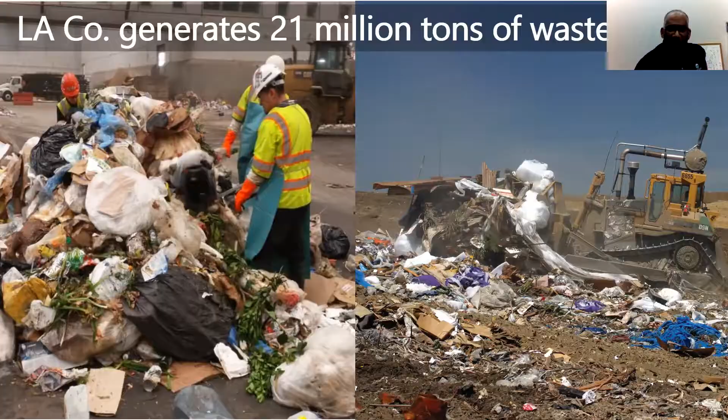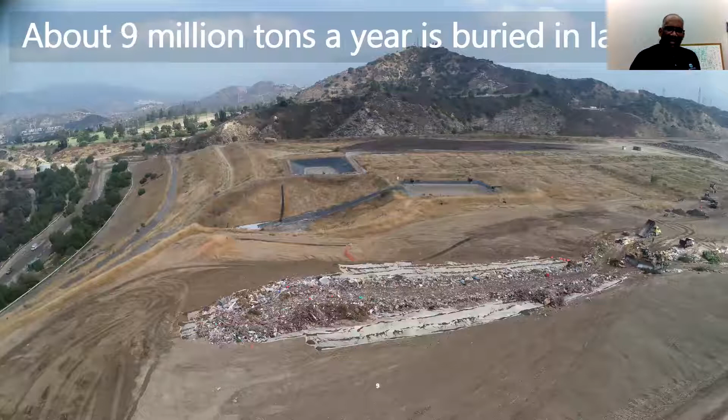So let's back up a little bit. LA County generates 21 million tons of waste per year. As you see here, of that waste, about 9 million tons are buried in landfills in LA County. And this is an aerial shot of one of our landfills, the Scholl Canyon landfill. And of that 9 million tons per year buried in landfill, a third of that landfill waste is organic in nature, food waste, yard waste, and so on.

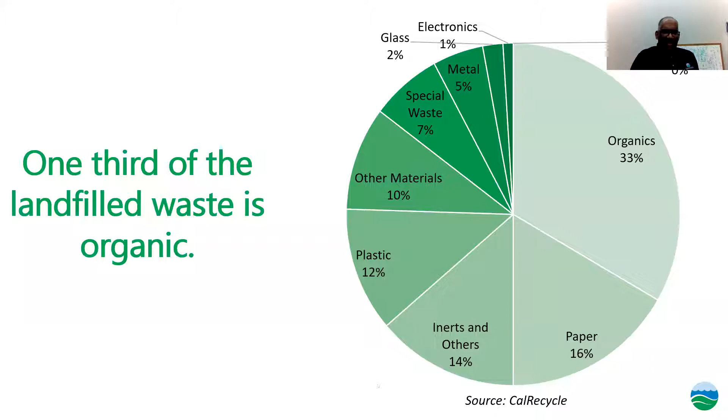And in LA County, a minimum of about 4,000 tons of food waste is thrown out each day. And there's a shot at our Puente Hills material recovery facility of some of this food waste that we take into our facility. And this food waste, if it's disposed in landfill, can release methane into the environment.

And one of the things that people don't realize is that methane is a greenhouse gas. It's 23 times more disruptive than carbon dioxide. And food waste is responsible for at least 6 to 8% of the greenhouse gas in our atmosphere.

So a number of years ago, California, taking the lead in terms of climate change, passed a number of laws. At the core, what these laws are trying to do is divert organics from landfill. There are 2 laws in particular. AB 1826 required mandatory commercial organics recycling. It started with a company that produced 8 cubic yards of waste per week. They ratcheted it down to 4 cubic yards. And recently, they ratcheted it down to 2 cubic yards per week. So there's mandatory organics recycling.

And then SB 1383, which required a 50% reduction in landfill organic waste by 2020, and a 75% reduction in organic waste by 2025. And these are compared to 2014 levels.

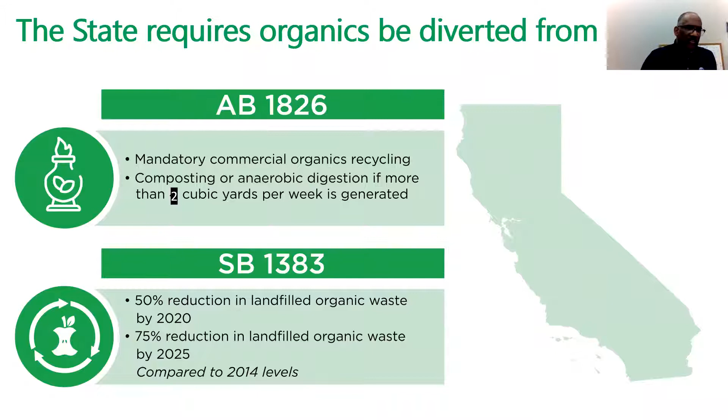No, you're good to go.

Okay, good. All right, so our food waste program can help cities and businesses meet these organic diversion laws. And we're uniquely situated because we have a wastewater side, we have a solid waste side. On the right, you see our largest wastewater treatment plant. This is the Joint Water Pollution Control Plant in Carson. And these circular deals here are anaerobic digestion.

So California law, food waste, if it's not going to landfill, then they want it either composted or anaerobically digested. And we have a lot of them. We have 24 anaerobic digesters. And the beauty of these things, they're sealed. All the gas that's generated in there is captured and cannot go into the atmosphere. So this is our largest treatment plant.

And then on the left-hand side, this is the foundation of our solid waste management facility. This is a shot of our Puente Hills Material Recovery Facility, and it can handle up to 4,400 tons of refuse each day. And so we can gather waste here and recycle it or segregate it or process it and then bring it to our joint plant. So we already have existing infrastructure to do this organics diversion, food waste recycling required by the state.

So let me break down our recycling program. We have 3 major steps. First, we have food waste. Source separated food waste is brought to the Puente Hills MRF and it's processed.

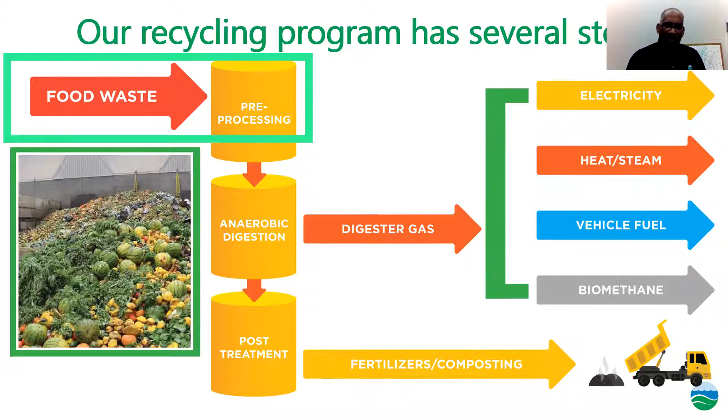And then the last step is the stuff out of the digester, we compost it, we turn it into soil amendment. But let's go through the first step, what happens to source separated food waste. So here you have source separated food waste. It may come from a grocery store or restaurant, a school, any kind of institution. We even have food waste bins at our main office that have source separated food waste. So we collect source separated food waste.

The hauler then brings it to our Puente Hills MRF, Puente Hills Material Recovery Facility. They weigh in here. It's about $70 a ton to bring in source separated food waste. But we also negotiate contracts that could be as much as $10 a ton lower than that. And then you would drive in after you weigh, and this is driving into our Puente Hills Material Recovery Facility.

You can see on the left recyclables that we've pulled out of the waste. This is a fully enclosed building. It was built in 2004. It can fit like 3 jumbo jets in there, and it's basically set up to recycle. If we find a commodity in the waste that has value, we can orient our operation and pull it out. So you can see recycled material being piled up to be sorted and recycled on the left, and on the right is where we take the source separated food waste, and we're going to take a closer look and show how we start processing that.

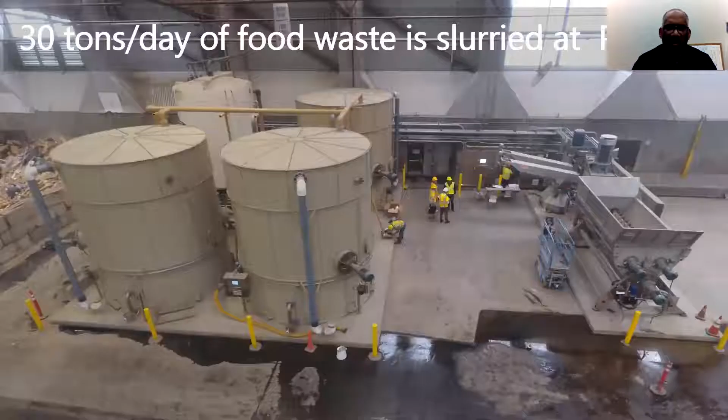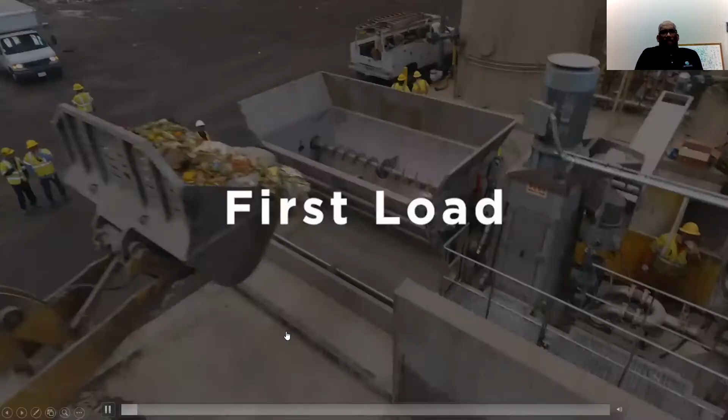So here's a closer look at that shot on the right. At the Puente Hills Material Recovery Facility, right now we're taking about 30 tons of source separated food waste, and it goes into this hopper, and then this hopper feeds into these 2 bioseparators, which are like huge garlic presses that squeeze the food waste through openings. And we'll show you a video of that. And then from there, that food waste is turned into a slurry and we store it in these tanks. So let's take a look at the videotape. So this is video taken the first day we opened this program a couple of years ago.

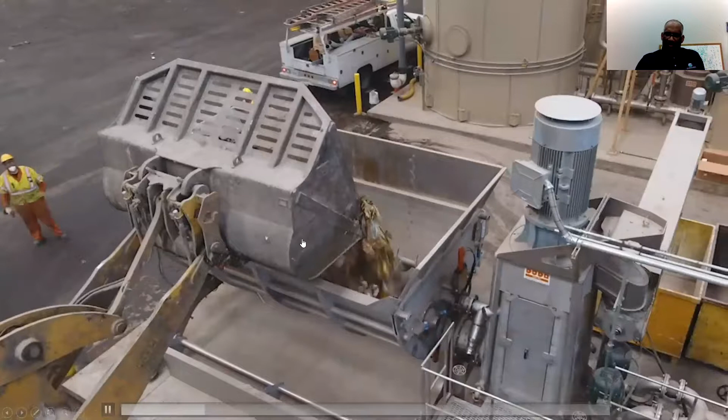This was the inaugural food waste in what we call our Doda system. You see the loader dropping stuff into the hopper, and then the food waste will be pushed into this, called a bioseparator. Let me just pause it here for a second. If you open up the door right here, this is what you would see. It's called a hammer mill, and Will is more of an expert on it.

The hopper feeds the food waste into this chamber that you see here opened up, and you can see these openings. Then these arms press the food waste through these openings. Just think of a garlic press, how you squeeze garlic through the opening. So the food waste is coming through this way, and the plastic and the inert material that we don't want stays inside, the same way you might have the skin of the garlic staying inside the garlic press. Let me continue with this inaugural videotape.

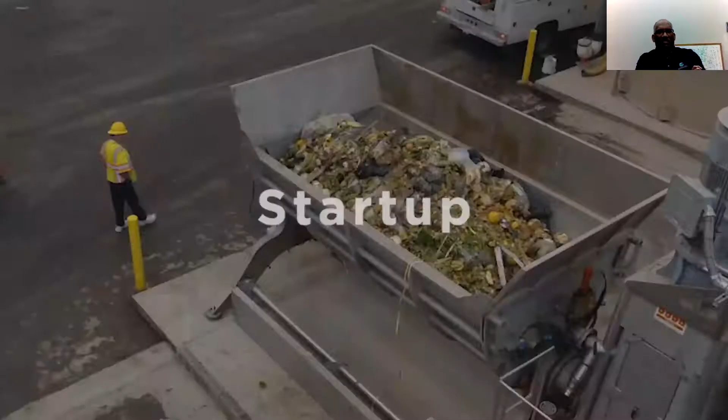Even source separated food waste has a lot of plastic in it. Not as much as regular trash, but much better. So every so often during the day, one of the operators has to clean out the bioseparator. Here's the hopper in motion. You can see the plastic bags, and you can see the plastic coming out of the bioseparator.

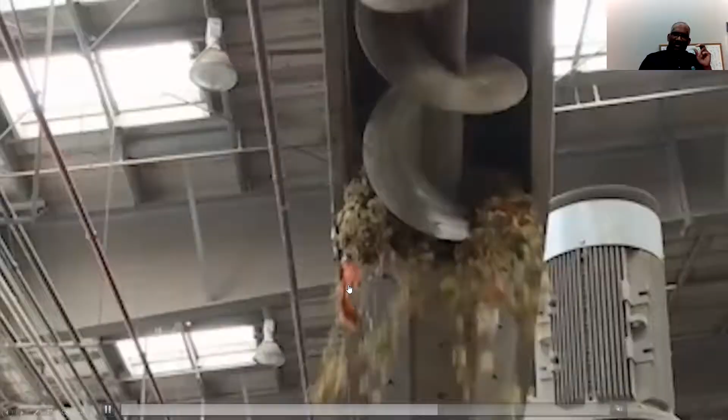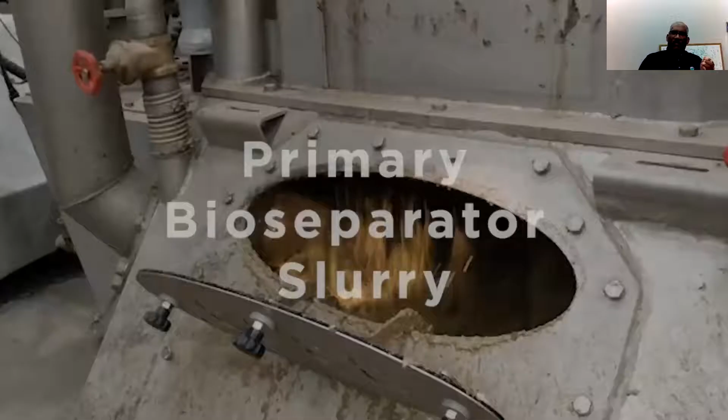There are two sets of bioseparators. The second set has smaller openings, so finer pieces of plastic get rejected, and that's what you see here. All this stuff, the plastics and the inert material, gets landfilled, and then you're left with the good stuff. This is what we want. Here's the food waste that has been slurried, turned into a smoothie type consistency. We mix it with water if we need to, but we need the right consistency.

And then that food waste is, as I said earlier, stored in these containers right here. And then from there,

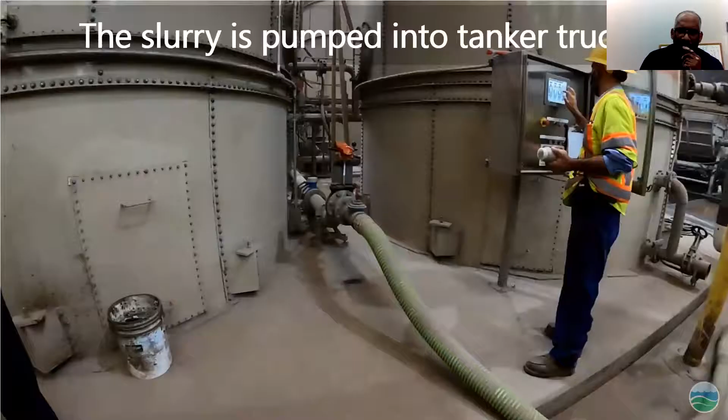Basil, yes, we have a raised hand from Lori. Okay. Hi, Lori. You have a question, Lori? Yes, I do. Okay, thank you so much. I really love the image.

This really works. But does Puente Hills accept only separated organics waste, or do you do any separation? Do you take any commingled waste and separate it, or do you only take separated waste from the cities? Right. And Will, you can chime in too. Will Chen is one of the engineers that helped set this program up. For this food waste program, we're looking for source separated food waste, because cleaning out those bioseparators becomes really time consuming if it's not source separated. We take other kinds of waste that may be commingled and separate them, but in terms of this food waste program, we're looking for source separated food waste.

Yeah, the Doda machine, and good morning, everybody. The machine that we have installed here that you're seeing in front of you was designed really to take source separated, pre-consumer waste. It's primarily coming from restaurants, supermarkets of that nature, where there are larger, let's say, cardboard or large plastic containers or bags that the machine can remove relatively easily.

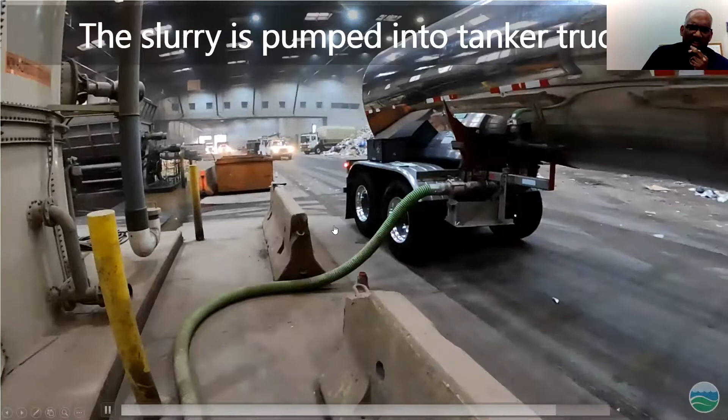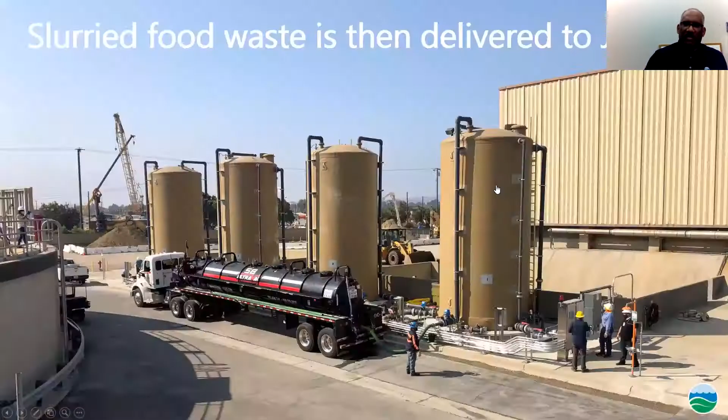All right, so this food waste slurry is then pumped into tanker trucks. And if we went before the pandemic, you would get a tour to see this facility. We drive into this fully enclosed facility, and you can see vehicles coming in. One of the beauties of this facility, it's pretty quick ingress, egress. You don't have to wait in line. But here the tanker truck is loading up the slurry. And then it's taken to our joint water pollution control plant in Carson. And we have 4 receiving stations that were recently built. So they offload the slurry into these tanks.

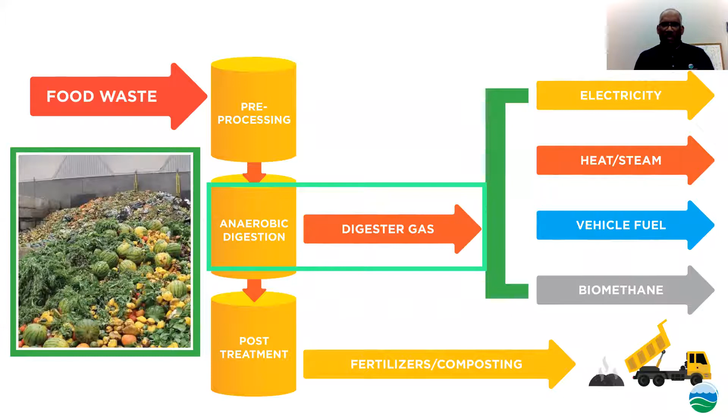And what happens is the slurry is then fed into what we call our anaerobic digester. You see a little bit of one of our 24 there. So this is where the second part of the process occurs. Anaerobic digestion of this food waste generates biogas that we use for energy fuel. So here's an aerial of our anaerobic digesters at our joint water pollution control plant. This facility is right off the 110 freeway at Sepulveda in the city of Carson. It's been there in some capacity since 1928.

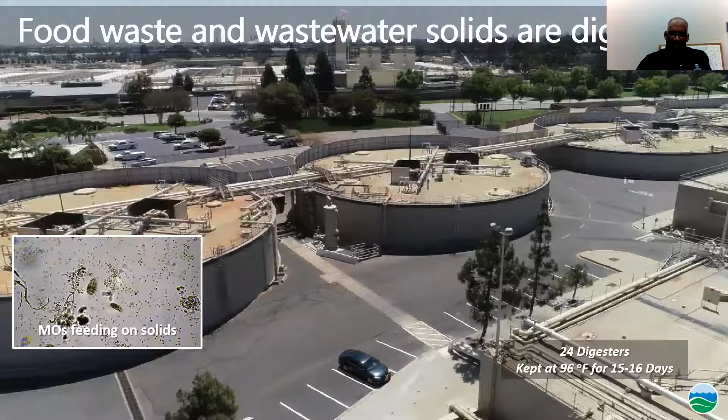And here's the digester. It's an oxygen-free environment. Microorganisms feed on this organic material, and they give off a biogas, which is mainly methane and CO2. About 15, 16 days in there. So here's the top roughly third of this digester. Here's what it looks like inside. These things are huge. Here's a 6-foot board right here. So this thing is about 10 feet above ground, another 30 or 40 feet below ground.

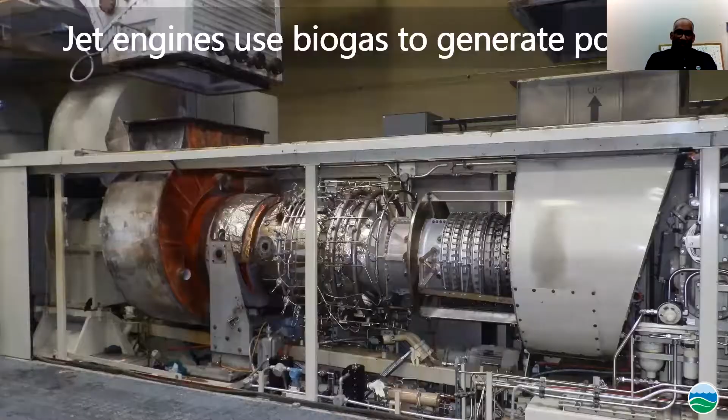And in here, we take the wastewater solids, because at its core, it's still a wastewater treatment plant. So the solids that are removed from wastewater are mixed with the food waste, and it's digested by these microorganisms, giving off this methane and CO2. And then that biogas is basically sent to jet engines. This is one of the engines at our joint plant in Carson, and these generate power. Here's our power plant there, what we call the total energy facility.

And so it generates power from the jet engine, and then the heat exhaust also generates steam. And so this whole power plant generates about 20 megawatts of energy. And most of this power is used to run the joint plant, that wastewater treatment plant. And it runs 95% of the time on this biogas, and it saves us about $18 million a year in terms of deferred energy costs.

Well, what's happening is we get more and more food waste into our system. We're generating more power than the plant might need. And what we've recently done is that surplus gas. So as we get more and more food waste coming into our Puente Hills material recovery facility, and right now that facility takes about 30 tons of food waste a day, but it could take up to 165. As we get more food waste there, we get more slurry, we get more gas. And so we're generating more gas than we could use to power the wastewater treatment plant.

So what Will and all the other folks in the energy group have done is that here's one of our digesters. They've connected a pipeline from the digester, and we will show you that. And you can see the cutout of where this underground biogas pipeline has been laid, and it goes to an existing fueling station. And we have a fueling station at the intersection of Sepulveda and Figueroa.

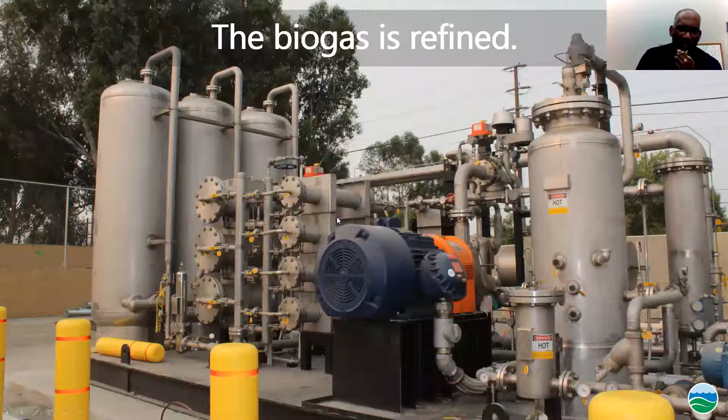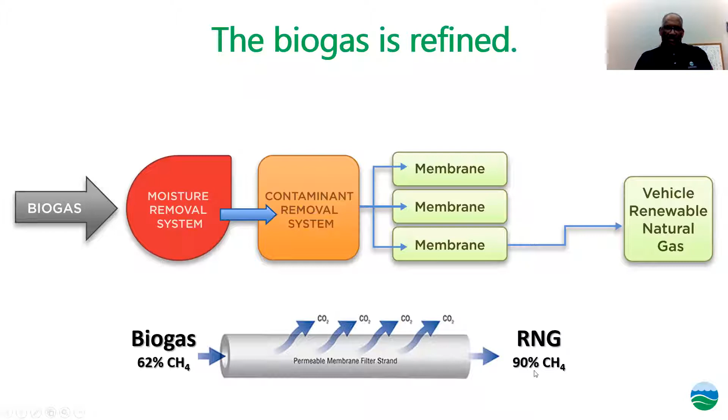Here's your biogas conditioning system. And what it does, the biogas comes in, you remove moisture, you remove other contaminants, it gets forced through a number of membranes, and then you have this compressed renewable natural gas. So we go from about 62% methane to, after the whole conditioning system, having about 90% methane. And we store it in these tankers. And then it goes to the fueling station right next door, and it's open to the public; anyone with a compressed natural gas vehicle can go there and fuel up.

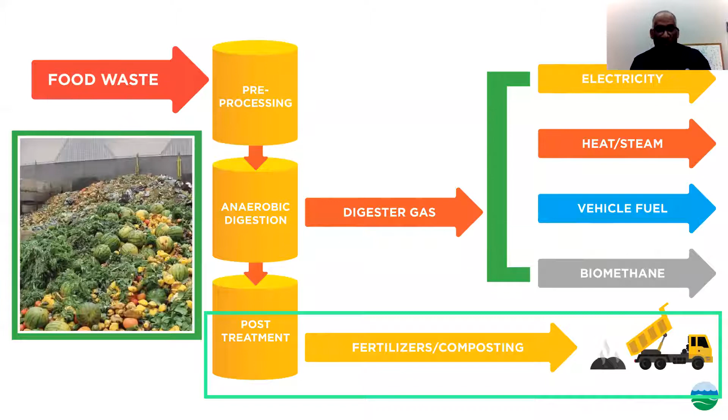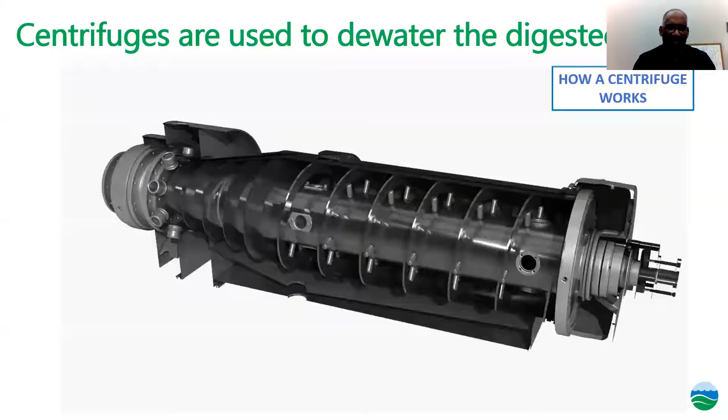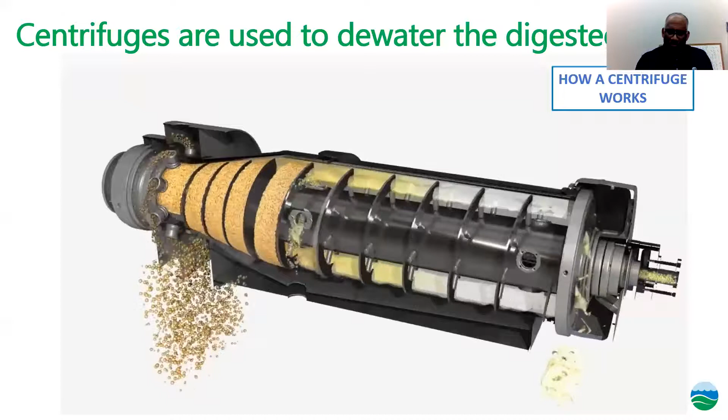And then the last step is some of the remnants of what's in the anaerobic digesters, what we call biosolids. And we try to recycle that too, because our mantra is converting waste into resources. Here's the digested solid. This is the building where the stuff that's left over in the anaerobic digester gets dewatered, because there's a very high water concentration even after 15, 16 days. But we put them through what we call a centrifuge, and it goes from about 3% solid to about 30% solid. We removed a lot of the water so we don't have to truck so much biosolids off.

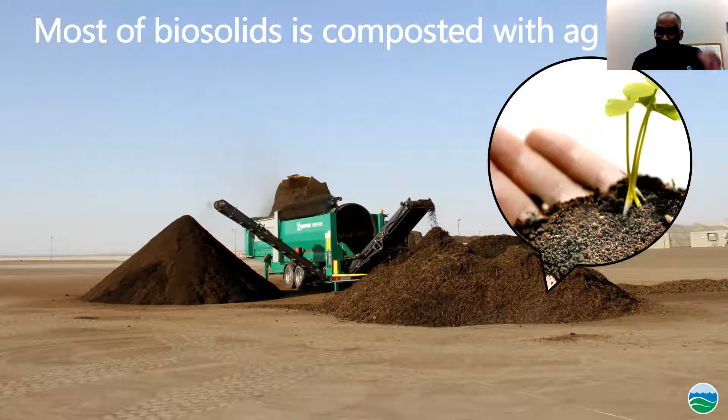And we produce this biosolids cake. We call it a cake because it looks like crumbled chocolate cake. And this is at the joint plant in Carson, what the biosolids look like. We then truck that off site, and we take it to a number of reuse facilities. We land apply it directly, or we compost it, use it as a soil amendment. And so here's the biosolids after it's been mixed with agricultural waste, and we create this compost that we sell, or it's used on local farms.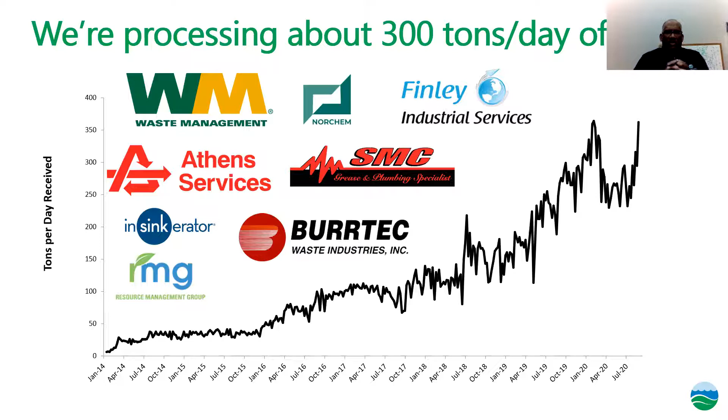And in addition to the food waste that comes from the Puente Hills MRF, we have a number of other haulers that have been bringing their food waste straight to the plant in Carson. And this facility, with our digesters, can handle up to 600 tons per day of this food waste slurry. And we're starting to ramp up to that 600 tons per day. Right now, we're producing about the equivalent of 2,000 gallons of gasoline in terms of power. And when we max out our system, we should get to the equivalent of about 5,700 gallons of gasoline, energy equivalent, produced from this food waste.

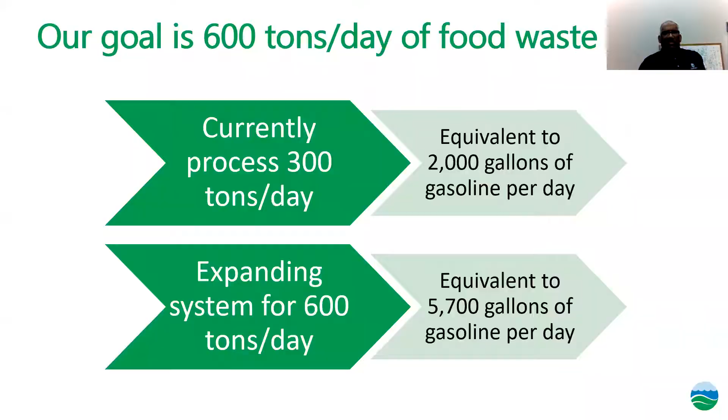Our goal is to max out the system, and we're well on our way. And as we generate more gas, more energy, we'll still use it for electricity. We'll still use it to fuel vehicles. And then we're exploring whether we can put some of that into a natural gas pipeline. But that's the extent of our food waste recycling program. Any questions?

Yeah, we have a few questions. Actually, we have a hand raised. Okay, great. Not anymore, actually.

Okay, so our first question is, why can't we mix green waste material from green bins with food waste to process this way? That's a Will question. Well, where we're taking our material, it's going to the joint plant, and imagine that it's a large kind of stomach, and if we were to take primarily twigs and branches and wood, it really wouldn't digest quickly enough. Again, these digesters are designed originally to take wastewater, normal wastewater sludge, and all that stuff really has to be digested within about 15 days, and that's what we refer to as our hydraulic retention time.

So in order for any of our customers to bring slurry to our facility, we have a slurry specification, and there's about 30 to 40 different parameters that it has to meet. So if we were to, let's say, have a new potential customer, if they can prove that the slurry they produce can meet our specification, then that would mean that it's acceptable to those digesters without really messing anything up biologically speaking. And then that would be okay. Not to say that we can't mix green waste with food waste, but again, we have to make sure that the specifications are met before we introduce any of that material into the digesters.